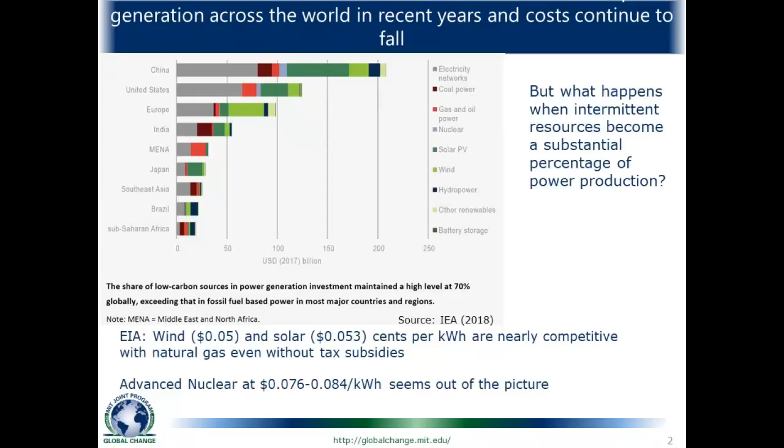Of course, you all are aware that the intermittency of renewables adds some additional costs that aren't captured in a levelized cost basis. So very quickly, there are a range of different electricity modeling levels, from capacity planning down to protection, stability of the system, load flow. The model we have doesn't get into stability and load flow. We're combining capacity planning down to economic dispatch.

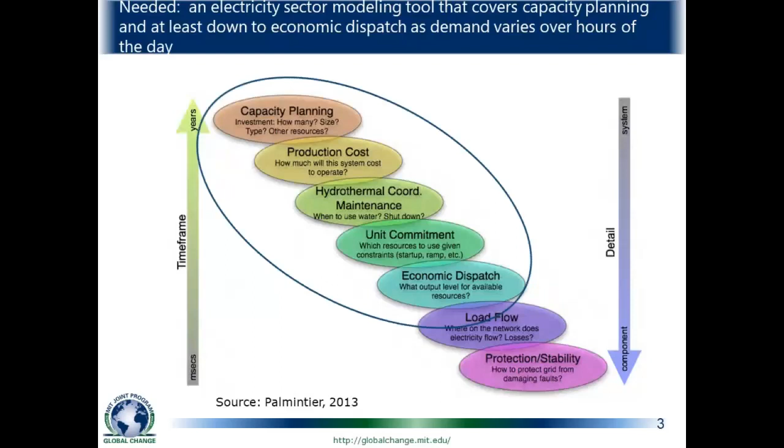So that's just a little thing about the model. There's another little slide on the model. It's deterministic. It's a cost minimization LP model that chooses the least cost options to build out as things retire and you need to build more. And then once the stuff is built, it dispatches the best.

There's various ramping limits on technologies. So one of the things, of course, is that nuclear is inflexible. So we have, in the base case, some limits on what you can do with that in terms of nuclear flexibility. So I'm not going to go into a whole bunch of the model. Hopefully, I had on the front page or somewhere a reference to the paper if you want to go look at it. If not, you can ask me. I'll send it to you later.

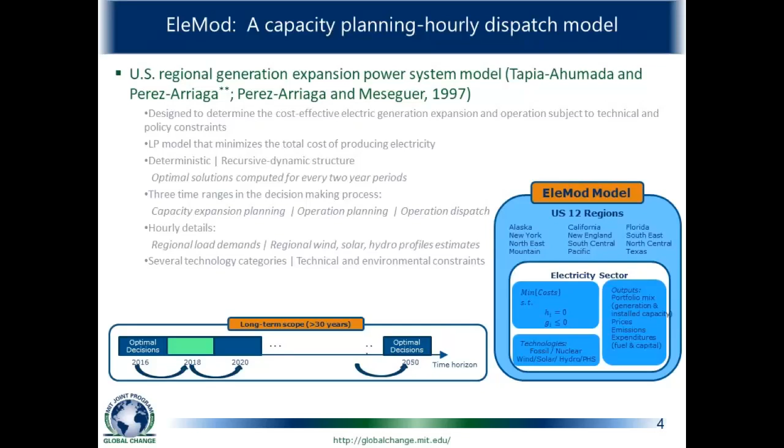So the scenarios we ran with this model was a reference with technology costs starting at, we used mostly EIA costs, but wind and solar, we wanted to make sure they were declining, that we're not disfavoring them. And of course, their advance has been fairly rapid. So we have them declining in cost at 3% per year, reaching a little at $30 to $50 a megawatt hour, where nuclear is at $94 per megawatt hour, the EIA current cost.

We do a cap. The rest of the scenarios all have a carbon cap, reducing CO2 emissions in the electricity sector by 90% from 2005, with the base technology assumptions there. Or then we have a low nuclear cost case where we drop it to 55 to 60 dollars per megawatt hour. Again, still considerably more expensive than the renewables, at least on a levelized cost basis.

And then we remove the limits on nuclear ramping up and allow it to ramp up and shut down easily. So a flexible nuclear case to test whether with greater flexibility, you could get more renewables and nuclear could play the flex role. We also have some pumped hydro storage ability that can work during the day, but we limit it to being charged or discharged in one day. You can also spill the renewables, so you can just build more renewables in different places and spill them. We've used a base NREL map of what renewable variability is for different regions of the country.

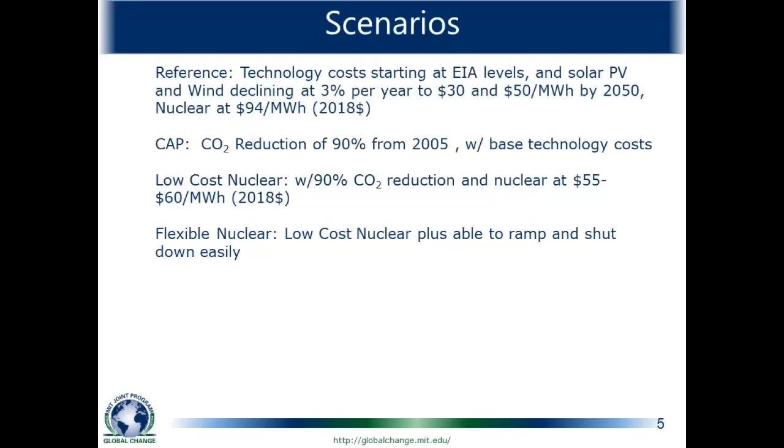So to get to the scenarios, this is, I think, the key scenario here. And so if you start on the very left, you see that is the generation from different sources in the reference case. And you see in the reference case, the green and blue on top are wind and solar. And you see that they continue to expand through that period, even without any additional carbon cap, because they are at the cost assumptions gradually getting less expensive than any other option on a levelized cost basis.

And this is going from 2016 to 2050. The next group over, that's with the cap case. And there you see wind and solar expand even more. We're achieving the cap. You will see on the bottom, the bars pointing down below, that we are getting a fair amount of spillage of just wind and solar being produced when there's no demand for it.

The next one over, we lower the cost of nuclear to that $55 per megawatt hour. And now all of a sudden that changes the picture pretty dramatically. We have a big expansion of nuclear. We still have wind and solar reaching about the same level it reached in the reference case, and so it is contributing to decarbonization. But once you get into that higher level, about 40%, we don't see it expanding much after that.

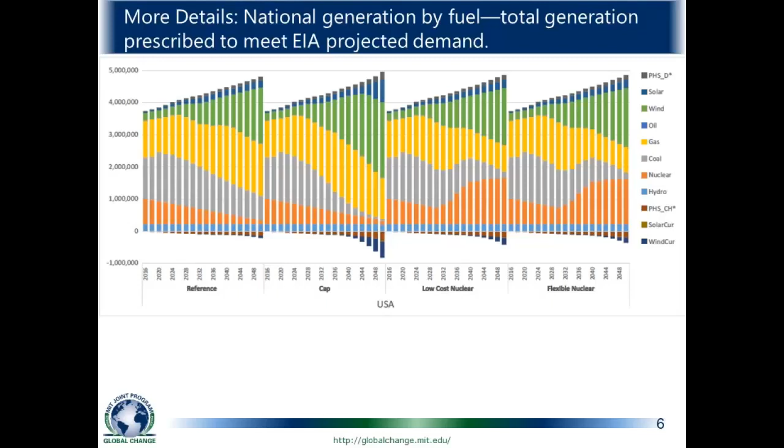And this is just showing the flexible nuclear. The low-cost nuclear is the same picture, essentially. But what you're seeing is that in that cap case, when we're relying more on wind and solar, we're building a lot more capacity. And that just reflects that a lot of it is being built and spilled. That's cheaper than a lot of pumped hydro storage or the expensive nuclear in that case. So that's kind of the trade-off there.

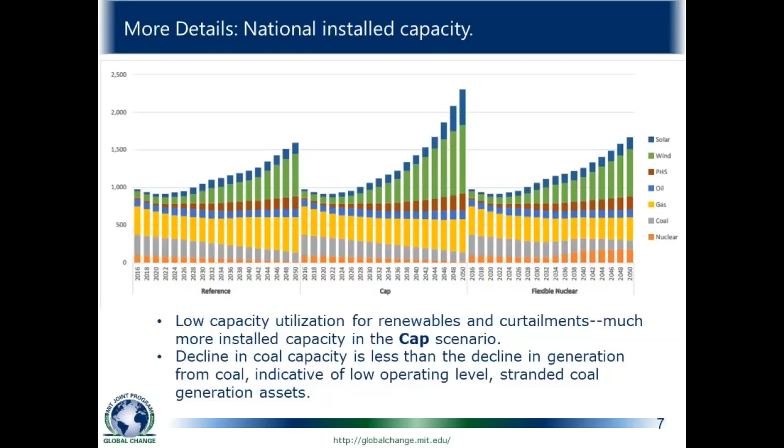What's the relative cost of nuclear and renewables? Nuclear doesn't have to be as cheap as renewables on a levelized cost basis, but it can't be as expensive as it is now. So what does that do? Well, this is a carbon cap, so we have carbon prices. You see the benefit of having that low-cost nuclear. Without that and just the renewables, you see the carbon cost rising up to almost $150 by 2050. So it just becomes ever more expensive to have enough power when you need it, when you don't have a dispatchable power source.

But if we add in the low-cost nuclear, then we get the carbon price dropping by 70%. And you see the flexible nuclear is a little bit cheaper than inflexible nuclear. So there's a little bit of an advantage to flexing it, but not much, at least going out to 90%. Now, if we wanted to go to 100, maybe then you would get something. But then you have to ask, could you get something like carbon-neutral biogas coming in? So that would be the other thing to look at.

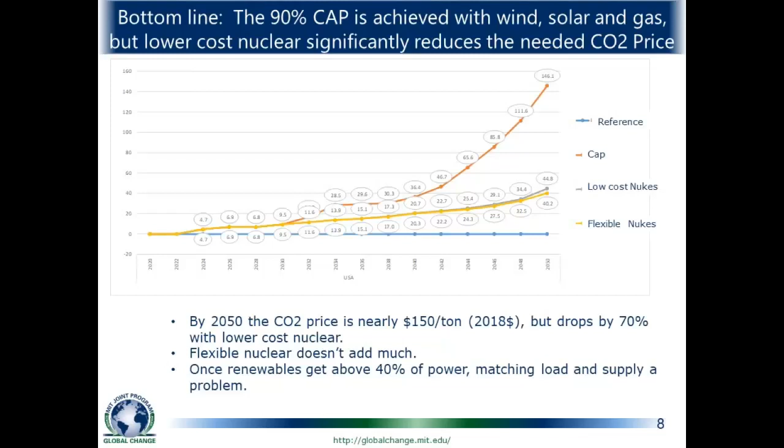So, variable renewables and nuclear, match made in heaven? Well, there is no match. I think they're mostly substitutes. The nuclear technical flexibility was largely irrelevant. We talk about economic flexibility, and you don't want to flex nuclear from an economic standpoint. So that seems to be more important than technical flexibility.

I think there are three basic possibilities here. Nuclear is too expensive and completely out of the picture. Nuclear is more expensive than renewables, but less costly than adding storage or spilling renewables, so that's when you get both. Or if it were really cheap and less expensive than the renewables, then why would you build any of them? Where the boundaries are between these three cases depends on the relative cost. We haven't pushed this near 100% carbon reduction, so that could change the picture a bit.

And this is an optimal planning model. There is always the result that the world never turns out as our optimal plan. Maybe under that situation, there would be some value to having technically flexible nuclear, because you might end up having to flex it in situations you didn't plan for.

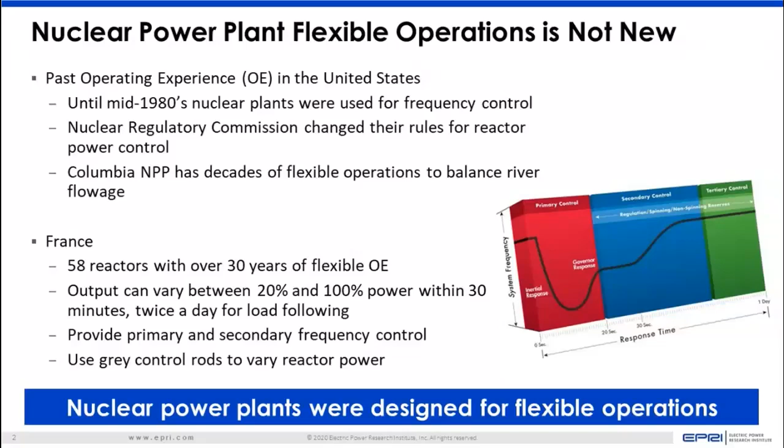So let's talk a little closer in the U.S. and some more recent experience. As renewables started coming on, a number of our EPRI members in the U.S. in particular, and also in other countries, started coming to us because what they were experiencing was these periods of negative prices. And so we started a research program. So since the mid-1980s, people haven't been operating flexibly in the U.S. and some of the other countries around the world, and they've kind of gotten used to being baseload plants. So we put together a research program. We wanted to assess the long-term impacts on the fuel and the plants and help develop some proactive strategies as we moved into flexible operations.

And we went at it with a phased approach. And this started in 2013. Since then, over 20% of the plants in the U.S. right now are operating flexibly in some range. And I've hit some of the highlights here. Xcel participates in a day-ahead market, and they're operating between 70 and 100% power. Exelon does what they call advanced nuclear dispatch, and they're in that same range. And you can see the ramp rates on theirs, and I can show you in the next slide some data that we have from Exelon.

The Columbia plant I talked about earlier, they do ramp between 70 and 100% power, and in the spring they also do periods of extended low power operation, particularly during the snow melts, to manage that. The Bruce plants just north of the border up in Canada, the CANDU reactors are designed so that they can bypass steam to the condensers, and they do quite a bit of maneuvering. As you recall, Canada has shut down their coal plants. So again, the base on the grid that is providing that flexibility is the CANDU nuclear reactors up there in Canada.

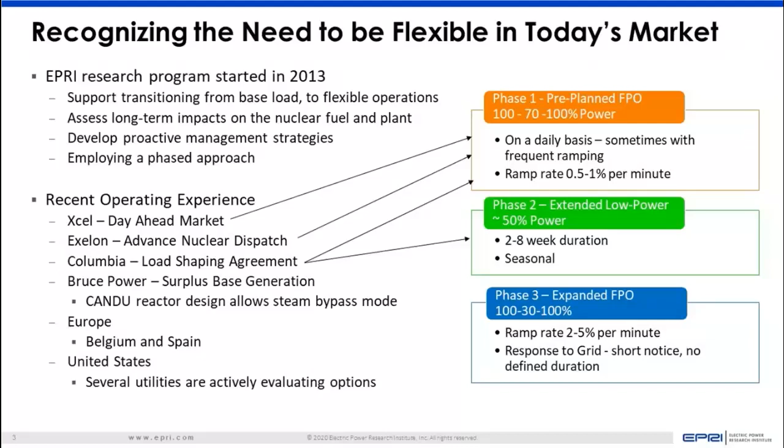So with that, we've been working, like I said, quite closely with our members, collecting the lessons learned as they've been operating flexibly since about 2013. The picture you see there, that is provided by Exelon for one of their PWRs. That's following economic dispatch over a 7-week period. That would be the spring, in response to the wind generation on the grid.

So what we found is it is very important, and this happens, that the plant operator does maintain the reactor in a safe operating window. The training for the plant staff, especially the operations crew, is critical. Chemistry of the plant does need to be monitored on a more frequent basis. For your pressurized water reactors, there is going to be some increase in water usage. So you have to look at your storage capacity on the plants and the amount of chemicals that you would use.

We've gone through and we've looked at, for some of the critical components, what the inspection frequencies and maintenance intervals would be. In some cases, those do need to be adjusted. When you look at the secondary side of the plant where you have the steam flow coming through, you do get some increased or some changes in the wear rates for the secondary piping based on the changes in the steam flows.

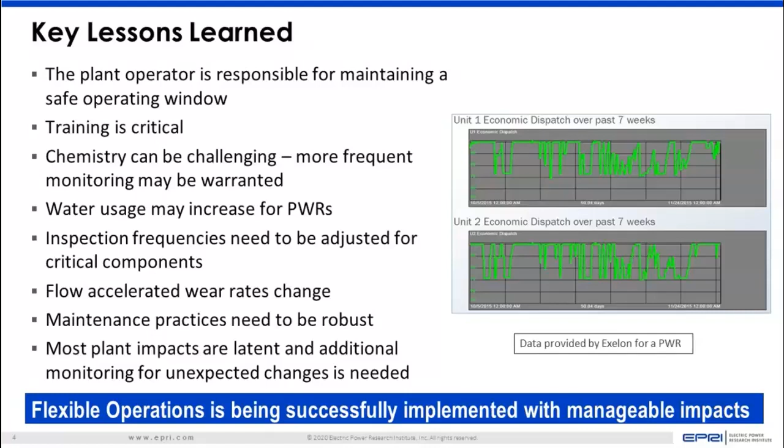The one thing that is important, when you're looking at this from a grid operations standpoint, is it's not like a coal plant. I'll say that right now. At least in the United States and several other countries, Spain in particular is one that we're working with, only a licensed reactor operator can change the power level. So what that means is that there needs to be a close coordination between the grid operator and the nuclear power plant control room.

And what we've found is that you want to have this well-defined up front so that there's a good understanding of the rate, the depth, the duration, and the frequency and the time in core life, which are all tied to the core physics, so that the grid operator knows when they can contact the control room, and the control room has a safe envelope in which they can maneuver the plant. This is all defined up front through these protocols.

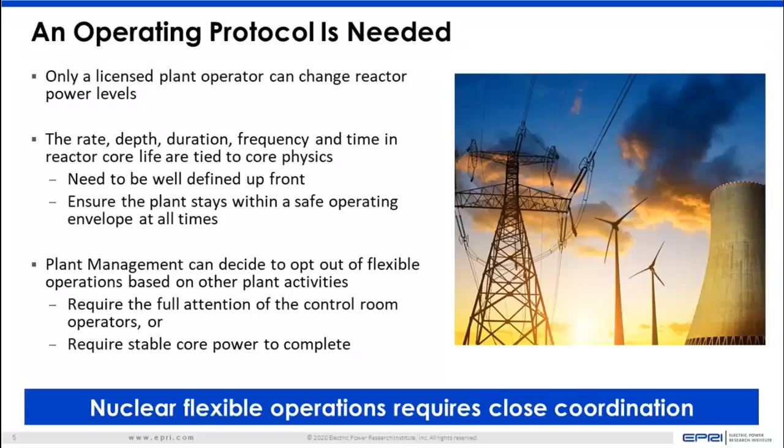And it also needs to be clear that any time the plant management can opt out of flexible operations. For example, if they do have other activities that are happening in the plant that do take their full attention, and there are certain tests that you need to do on a routine basis, like a core calorimetric, where you do need to have stable reactor power conditions in order to complete those tests. But other than that, with the protocols, things are working very well.

And we're looking towards the future with our research program on how we're going to optimize the flexible operations. We have some pilot studies going on right now on trying to quantify what the cost of the flexible operations is. We know the benefits and the value that it's giving. What we're trying to do now is quantify what is it costing the plant with regard to maybe some extra chemical usage or some extra maintenance frequencies.

We're also working on, for the plants that have been base load for a long time, how we can help them expand their range of flexibility. What plant modifications or changes would be needed to start approaching power levels as low as 30%, similar to what they do now in France.

We also have a study going on working with our power distribution group on grid services. Eric Ela, if he's on the phone, could do a lot better job explaining than I could some of the restrictions that FERC has right now on the primary frequency control from nuclear power plants. But we are working with him between our nuclear area and Eric's area on what is needed to look at primary frequency control from nuclear power plants as a grid service that could be offered.

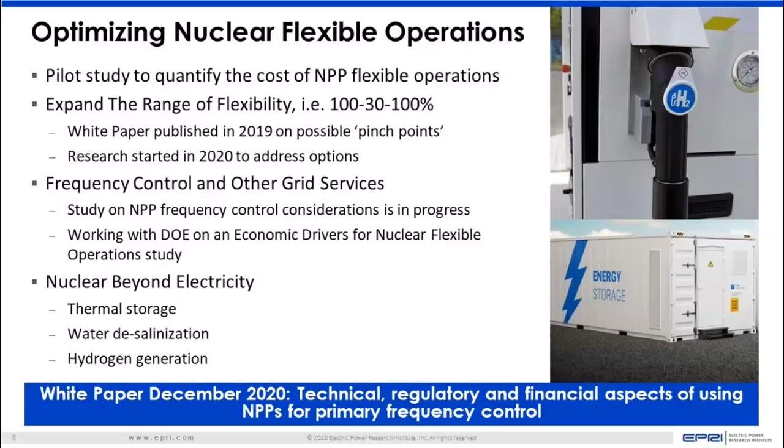And then we're also working on an area that Bethany is going to get into a little bit more after me, and that is what else can be done with the nuclear power plants. Instead of cycling the reactor up and down, can we look at using that energy for thermal storage, water desalination, or hydrogen generation?

This is an example. Again, Bethany's going to go into this a little bit more. I can look at it from the operational standpoint; she'll look at this from the economic standpoint. But if the plant's operating between 70 and 100% power, that's 30%, or 300 megawatts, if a typical nuclear power plant is 1,000 megawatts. Can you use that in a hydrogen electrolyzer to produce hydrogen?

The advantage is with the steam electrolysis, there's no carbon produced there, and you're using a no carbon emitting source from the nuclear power plant. So you're producing a low carbon energy carrier that has multiple uses. This is something we're very excited about, and the U.S. Department of Energy is funding some demonstration projects at some existing nuclear power plants to look at this.

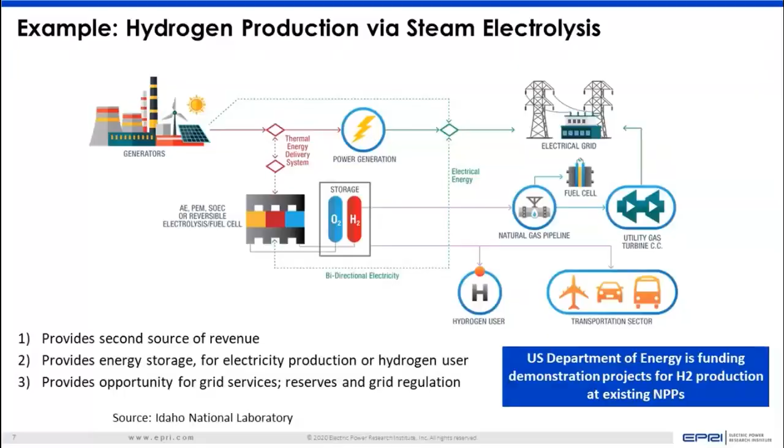And this was also touched on too, what does the future hold? Well, we're very excited, and I think our last presenter today is going to talk a lot more about the small modular reactors and some of the advanced reactors, and how by looking at it right from the start as you're designing the plant, there's the opportunity to be much more flexible. The other advantage that the small modular reactors and the more advanced reactors are providing is that they're going to have much higher steam output temperature.

To produce something like hydrogen today, we do need to boost those steam temperatures some more. It's still a good thing to do. The demonstration projects that are going on will be very useful to look at the economics and the logistics of producing hydrogen from the existing nuclear power plants.

But as you start talking about some of the advanced plants, the next generation, you can see that with the type of temperatures you get, you can directly convert using the steam with high temperature electrolysis, which is a lot more efficient, to produce hydrogen, ammonia, or other alternate types of materials. And the hydrogen can be used for direct energy usage, or it can be put into the pipeline to green up some of the natural gas. So these are just some of the options that we see.

So I talked a little bit about how, yes, nuclear power plants today are flexible, and looking to the future, we're looking at integrated energy systems with the plants today, and even further into the future at how advanced reactors can help with the flexibility, providing the electricity and some of these other forms of industrial processes that can be provided by the high temperature steam. So I go back and say that, yes, I think it's a match made in heaven. Thank you.

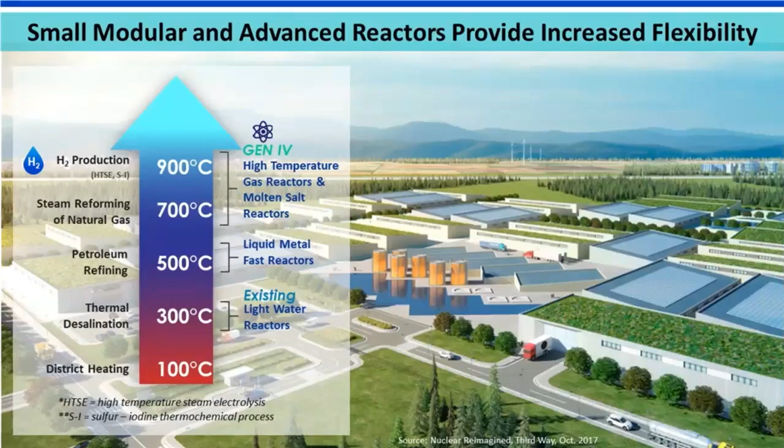Okay, thanks, Sherry. Our next speaker is Bethany Frew, who was a colleague of mine until a few days ago at NREL. Bethany is a senior engineer in the Strategic Energy Analysis Center at NREL. She's got a lot of experience with wholesale markets, power system operations and power system planning. She holds a PhD from Stanford University. Bethany, the floor is yours.

Great. Thanks, Mark. I'm really excited to be part of this panel and presenting on a different topic than I normally do. Those of you who know me from past ESIG events will recognize that I have a power systems analysis expertise. But this effort that I'll be presenting today, both from a conceptual framing standpoint and also some results from a publicly available analysis document, really reflects a much broader team effort that includes experts from the nuclear and the hydrogen perspective.

So I want to build upon some of the content that Sherry has presented, especially as part of this broader conversation about how nuclear power plants can remain economically viable in a low power price world. The work we've been focusing on at NREL, along with our project partners, has focused on two main approaches. The first is to operate the nuclear power plant less during times of low power prices, where you're trying to minimize your losses. So where you're being compensated at a lower price than the cost to operate, it makes sense to turn down.

The second option is to produce something of higher value during times when power prices are low. In the case of my presentation today, this something of higher value is hydrogen. So I'll be talking about how we can potentially hybridize nuclear power plants to produce hydrogen during certain hours of the year.

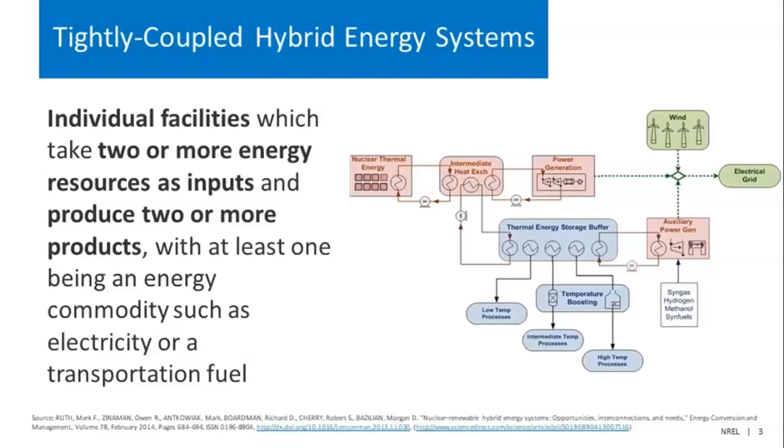In this case, we have a nuclear power plant and a wind generator as your two inputs, and your two outputs are electricity going to the grid, and then thermal output, which can be used for various industrial processes. So we're taking this traditional definition and applying it to a specific instance with a nuclear hydrogen hybrid system.

This is a very simple conceptual slide that shows what we mean when we say this nuclear hydrogen hybrid system. So in this case, we have a nuclear power plant that can send electricity as one product to the grid, or it can divert some of its heat and electricity, or just electricity, depending on the electrolysis process, to an electrolyzer to then produce hydrogen that goes to some sort of end use. Sherry highlighted a few of those end uses, and I'll mention a little bit more about that in a couple of slides as well.

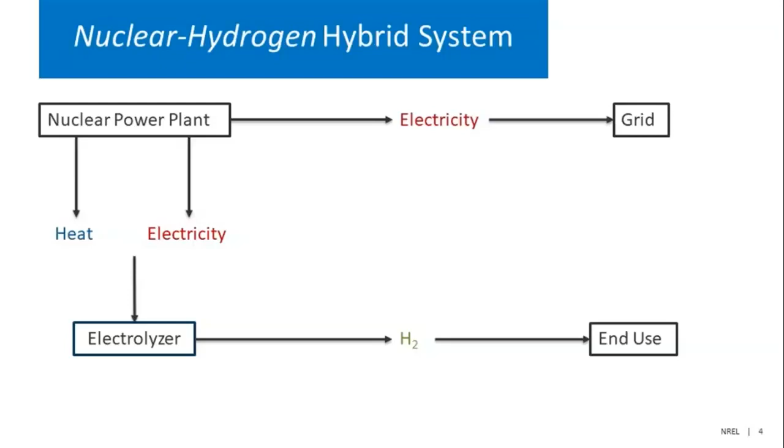And so in this case, again, electricity and hydrogen are our two products, but why do we care about hydrogen? Why is this something that we want to focus our efforts on? And it turns out that a non-trivial amount of primary energy use in the United States goes to producing hydrogen, about 2%. And if you look in this Sankey diagram here, you'll notice that the energy that is used to produce hydrogen is coming from natural gas.

This was mentioned a little bit in the presentations before me, but steam methane reforming is the traditional process that is used to produce hydrogen. And natural gas is the main ingredient for that. So when we're talking about hydrogen, the price for hydrogen is strongly correlated to the price for natural gas. And therefore, when we talk about carbon, it's driven by the natural gas input as well.

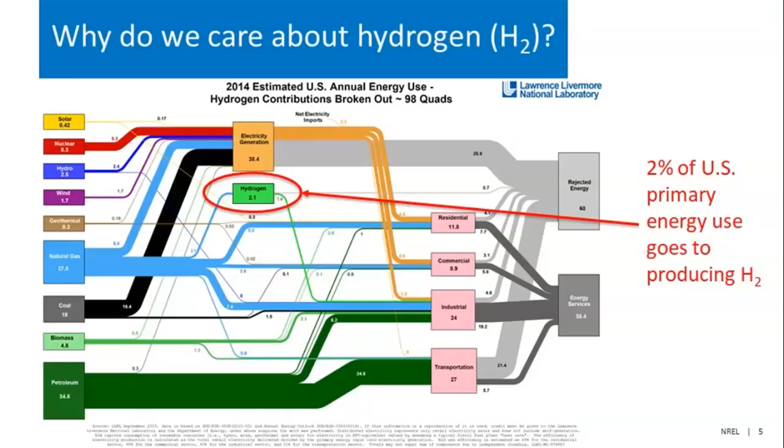There's also a lot of growth for hydrogen, and this is really the key part here, that we're able to think about these hybrid systems being able to contribute hydrogen to a growing demand for that product. Some preliminary results shown on this slide indicate that the hydrogen market by 2050 can increase by a factor of over 9. And this is, again, driven by applications from some of the traditional areas, including refining, also ammonia production, that's a big one, but also some newer applications.

Again, Sherry mentioned some of this previously, but being able to produce steel, being able to refine biofuels, and also contributing to a broader transportation fuel cell application. And also, Sherry mentioned this too, being able to inject some of the hydrogen into existing natural gas pipelines so that it can contribute to greening up that fuel source.

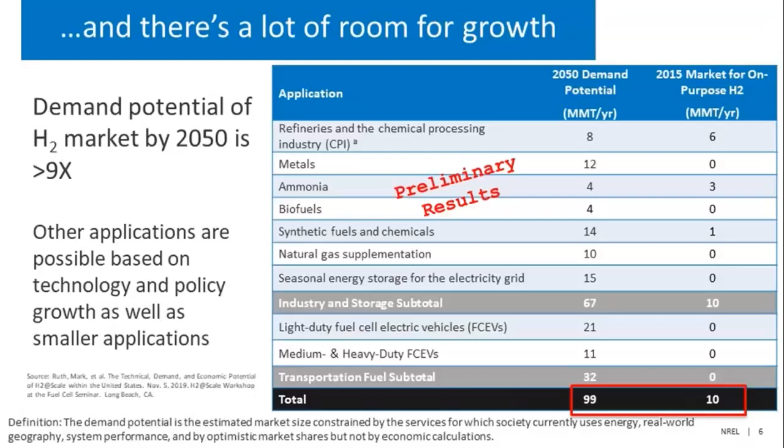So when we talk about hydrogen production, there are two main processes or options. There's low temperature electrolysis and high temperature electrolysis. Low temperature electrolysis, which is shown on the left, only requires electricity. So you'll see on the bottom left figure that the gray arrow going into the low temperature electrolyzer is just electricity. Conversely, high temperature electrolysis on the right side requires both electricity and thermal inputs. And so you'll notice in that figure on the bottom right that there's a gray arrow from electricity and a red arrow from the thermal component.

So because low temperature electrolysis is lower temperature, it's lower efficiency, but it also has lower costs and it's more nimble and simpler to integrate. High temperature electrolysis, because it's a higher temperature, is higher efficiency. Currently, it's higher cost, but there's a lot of work being done to try to drive down some of the material costs that go into that process. It's also less nimble.

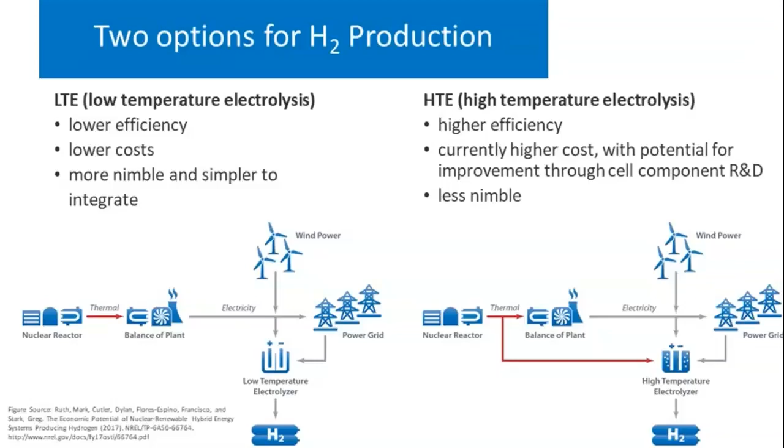So potential benefits of hybridization, and this is really the crux of why we're doing the work we're doing, is that you can imagine with such a hybrid system you can dynamically adjust the overall output of your, in this case, two products, electricity and hydrogen, to be able to maximize the revenues for the overall system. So when electricity prices are high, you maximize your electricity production. When electricity prices are low, you maximize your hydrogen production.

And so you can imagine a future where we have a lot of renewables, and this gets back to the focus of this entire session. You have a very high penetration of zero marginal cost resources, and so many hours of the year are low or zero LMPs for your energy prices. And so in that case, you might have this hybrid system that is producing hydrogen for most of those hours that are low prices, and then only a relatively small number of hours it's producing electricity and effectively operating more like a peaking plant.

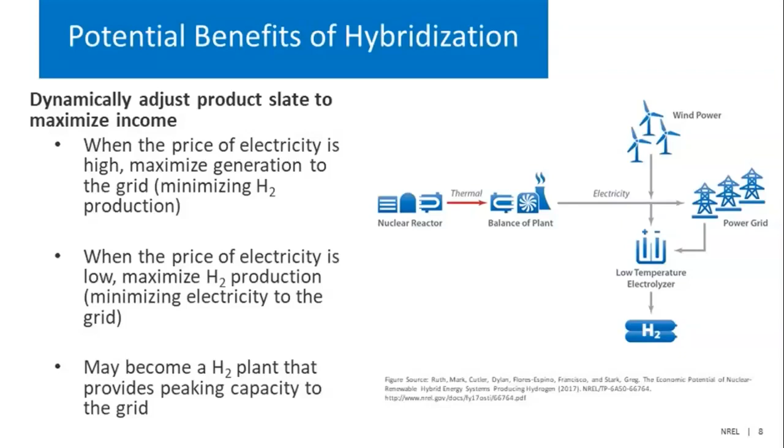And so this sort of conceptual framing and justification is what led us to the work we're doing now, and we were charged with maximizing the profitability of such a setup for a specific nuclear power plant that could be converted to this hybrid system. And so with the remaining couple of minutes, I'm just going to talk through an analysis that we, along with the project partners that I mentioned earlier, have conducted, and this is just one example.

The second main component is electricity price estimation, which is what we did at NREL. This involved capacity expansion modeling to project what the build out for future years at this specific location of this nuclear power plant would be, and then taking those build outs and putting them through a production cost model to estimate the hourly LMPs. And so the combination of these electricity prices and the hydrogen market estimation were fed into a techno-economic analysis led by Idaho National Laboratory that determined the NPV profitability.

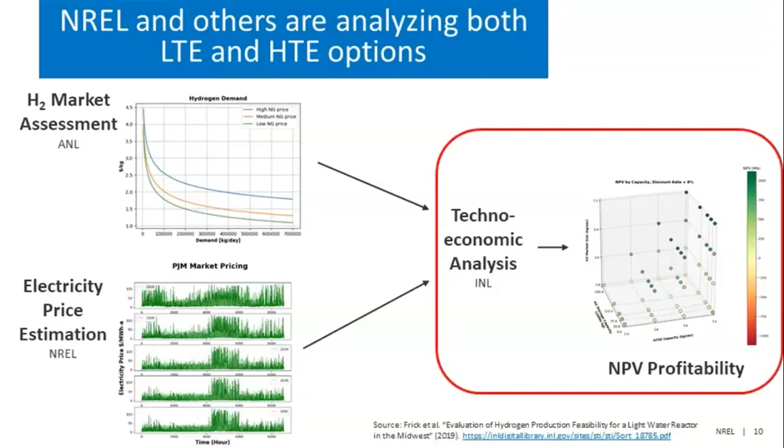And so I just want to take a couple of seconds to talk about this piece that sort of pulled all of this together. Again, this was looking to maximize the net present value. And there are three main dimensions of this analysis, again, looking at all hours of the year, and that's shown in the figure on the right. Those dimensions are the hydrogen market size, which is the vertical axis, the hydrogen storage capacity, which is the axis that's going in and out of the screen, and then the electrolyzer size, which in this case was a high temperature steam electrolyzer, which is on the horizontal axis.

And so the profitability really depends on a lot of factors. There's a lot of interdependencies that happen here. It's very location specific. And so some of the key levers that we found in this work is that profitability depends on the relationship between hydrogen and electricity market prices. So if electricity market prices are really low, then it makes a lot of sense to produce hydrogen. If prices are very high, then it might not make sense at all, and you're better off maximizing your output in the electricity market.

It also depends on the size of the electrolyzer versus the hydrogen demand, and also the size of the hydrogen storage. The electrolyzer and storage are capital intensive items, and so if you oversize those and you aren't able to have sufficient utilization, you're basically wasting capital.

So the key finding, and this is what I want to leave you all with, is that nuclear power plants with regional demands for hydrogen, so in other words, again, it depends on the location, have the potential to increase their profit margins by hybridization with hydrogen production. Again, a lot of details are involved with this, but there is the potential.

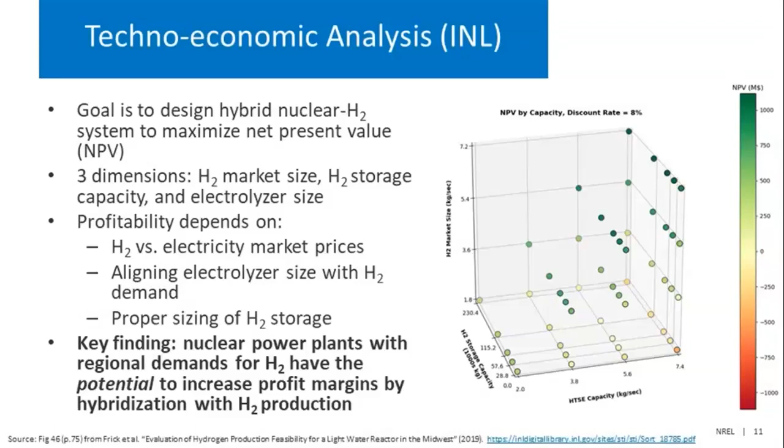There's been several comments made about the fact that electrolysis needs to be run 24/7 to make it economic, and the same is actually true for nuclear power plants. So is what you're proposing playing to that? Does the electrolysis run 24/7? Maybe not by nuclear, but by other means. Is that correct?

At least in the configuration that we've been evaluating, the nuclear power plant is running 24/7, so it's running at full speed. In layman's terms, you're effectively throttling between electricity maximization or hydrogen maximization. So you still have the same amount of steam and electricity. It's just whether, assuming you have a high temperature electrolyzer, you divert some of that to the electrolyzer or send it all through to the grid.

But I can't speak to that. At least in the work we've done, we haven't been assuming that the electrolyzer is running 24/7. I think there's a lot of options, and this is where Idaho has taken the lead in optimizing the electrolyzer size and operation. So I might let others who are more knowledgeable speak to that point. Maybe the electrolyzer may be uneconomic in that case, but we'll see.

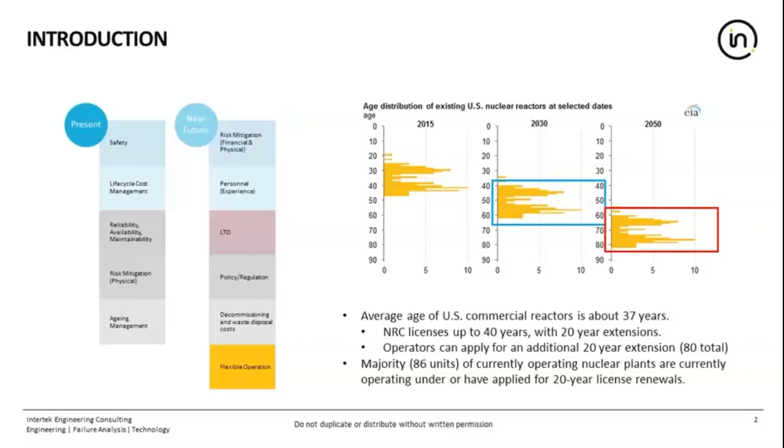Of operation, and some have applied for an 80-year extension. So long-term operation certainly is part of the equation. And then I think flexible generation will become part of the equation for these operators. So we are obviously looking for grid flexibility and increased renewables, but I think part of the discussion is having to operate these nuclear units safely.

If you go to a nuclear site, I think the number one motto there is safety. Reliability, obviously, but then to some extent cost recovery, because if in the French case you increase the cost of generation by 2%, if you look at the paper, then already nuclear is not all that cheap to operate, and I'll show you that, especially if you don't operate it baseloaded.

So similar to what Sherry said, most existing plants actually are already designed to respond to some amount of load change, and you can do that without tripping the reactor. And the other case, and this is not common, you need to get regulatory requirements met, safety requirements met. But you can actually reduce the thermal efficiency of a nuclear unit by dumping that steam into the condenser. So there are certain mechanisms available to units today without a lot of operational changes or extra O&M or retrofits to make them flexible.

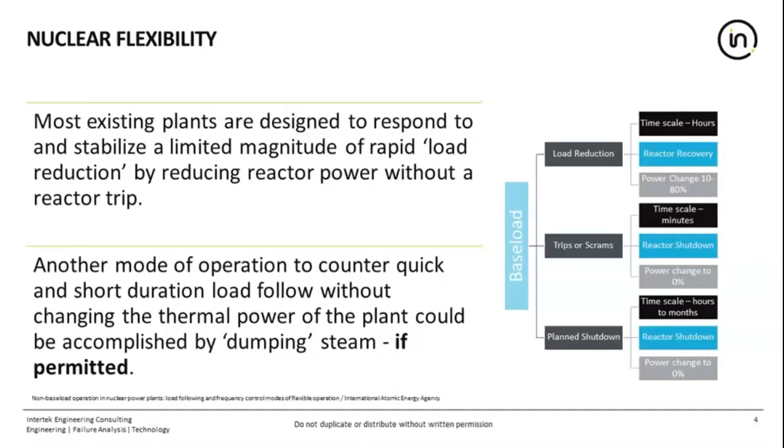So I won't talk so much about baseload operation or frequency control. Let's talk a little deeper about load following, because with flexible nuclear generation, maybe the SMR designs, newer designs, will be able to do more than load following. But in today's scenario, let's just focus on load following. So what we're talking about is megawatt changes up and down, not turning off the entire unit. There are certain ramping constraints and some minimum load requirements here.

So even with the French units, not all units go down to 10% or 15% low load. There are certain limitations to minimum load. There is some equipment damage. There are also fuel cycle limitations. I think Sherry mentioned the PWR units. As you get into the latter part of the fuel cycle, even the French operators minimize the flexible operation on those units depending on the health of the system, economics and obviously cost. So that's really what I'll focus on.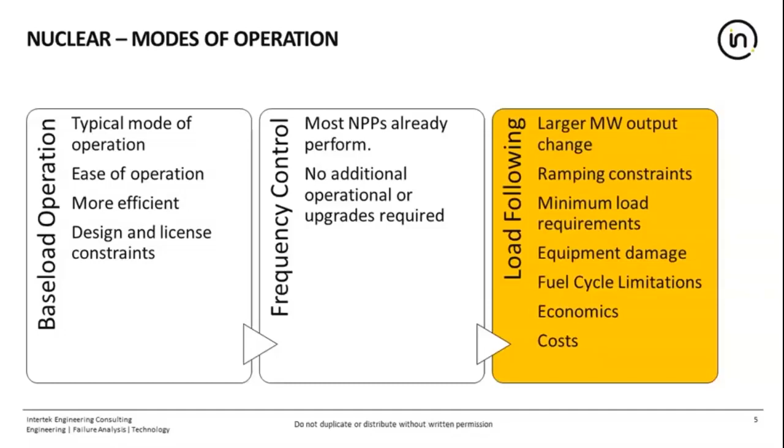And here's the German case. It says grid requirements in the 1990s, 1992. The blue lines show what the grid requirements were back in the 90s, and they were considered in the safety analysis and establishing the design limits, which are in the red. And they actually included flexible operation back then in the 90s. They've been expanding some of these limits even today, for however many more years they operate. But this was part of the design mechanism for the German PWRs.

In the US, we haven't quite done that. The French obviously do that. But if you look at that table when you get the slides, you can see in more detail that there were quite a lot of cycles allowed within the design framework of these units to operate safely. So that's just one example.

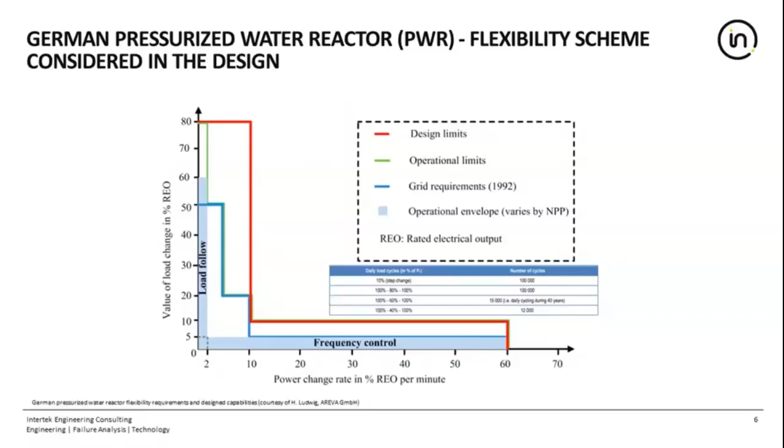And then this is the Bruce Power operation, which is in blue. This is a little bit old. I was trying to look at more recent operation with flexible generation, and it's actually minimized a little bit, possibly for some other reasons I'm not entirely sure of. But a couple of years ago, we could clearly see a lot more movement for Bruce Power over the day and over the week as it operated flexibly. So units are, as Sherry said, operating in some amount of flexible generation already.

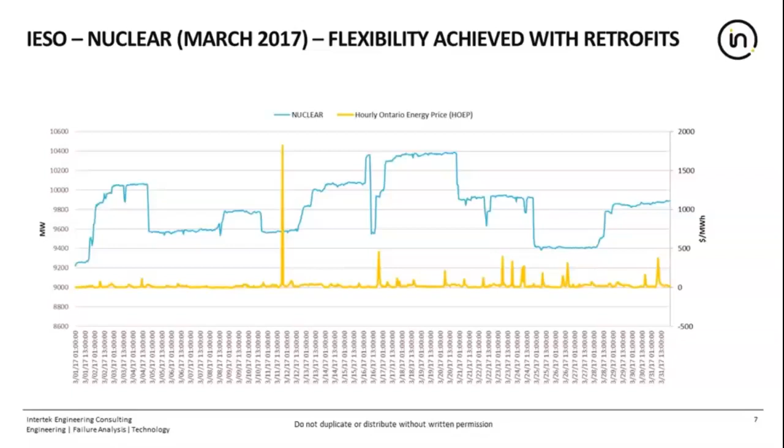And before we get to the economics or cost recovery of flexible generation, let's see what's happening already in the US. The market is actually the big driver for a lot of closures. So 11 gigawatts of nuclear capacity is about to retire by 2025.

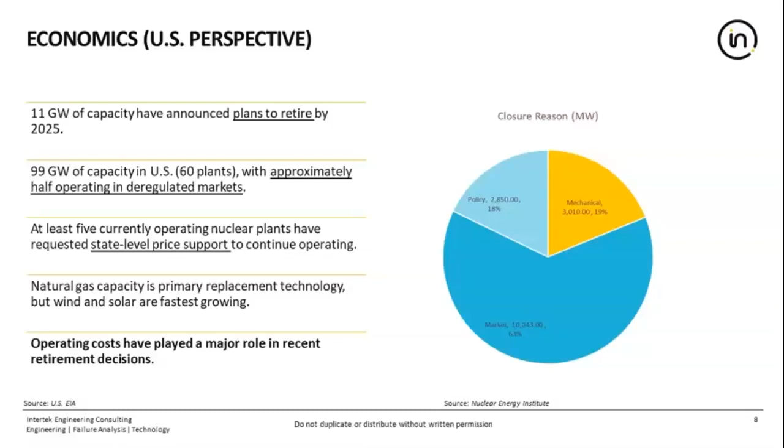Half of the units operate in deregulated markets. So there is a lot of pressure from the market. But the big problem here in my world is that the operating costs are the major drivers of why they're not in the market when they're operating. And when you look at it from an O&M standpoint, the nuclear units, both from an operations standpoint as well as maintenance standpoint, are far more expensive than the conventional fossil fleets.

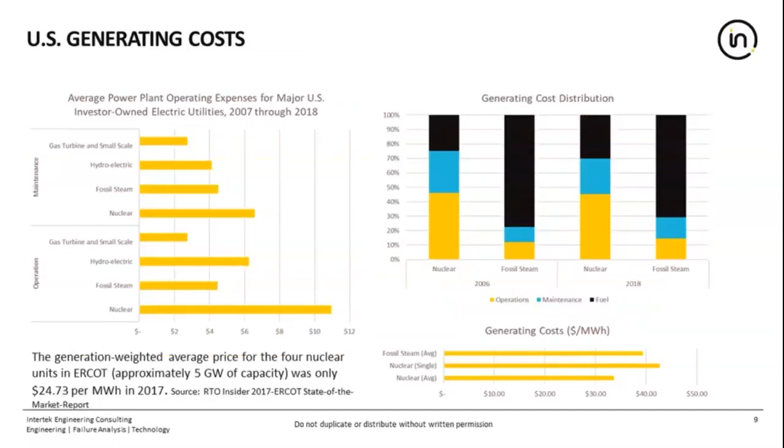And so we have been making efforts to reduce that over time. So when you look at this chart, you could see that in the past, from 2002 till about 2012, we saw a steady increase in cost for nuclear units. And this was a lot to do with relicensing and uprates and all of that. But there has been a lot of effort on the part of nuclear units to reduce that cost. So we're seeing an encouraging trend of reduced O&M, which hopefully into the future will help make operating in deregulated markets a little bit more profitable.

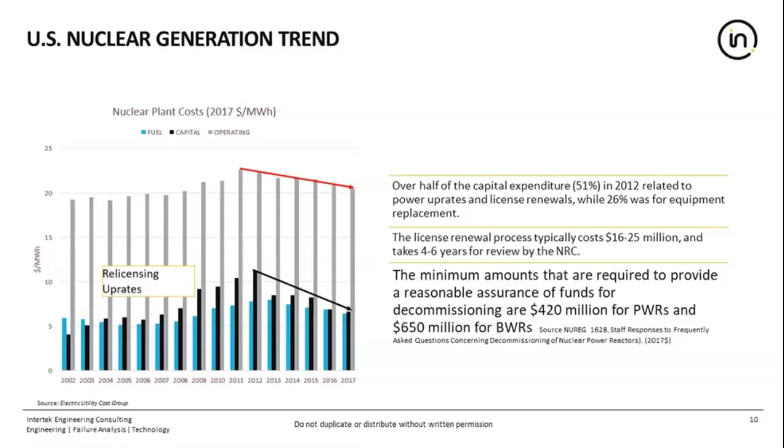So when we look at nuclear flexibility, we need to take into account the range of operation, the duration of low load operation, and the ramp rates. I'll talk a little bit about ramp rates in the coming slides, but there are a number of things that we need to take into account as we operate these units flexibly. So I'll leave it at that and keep going.

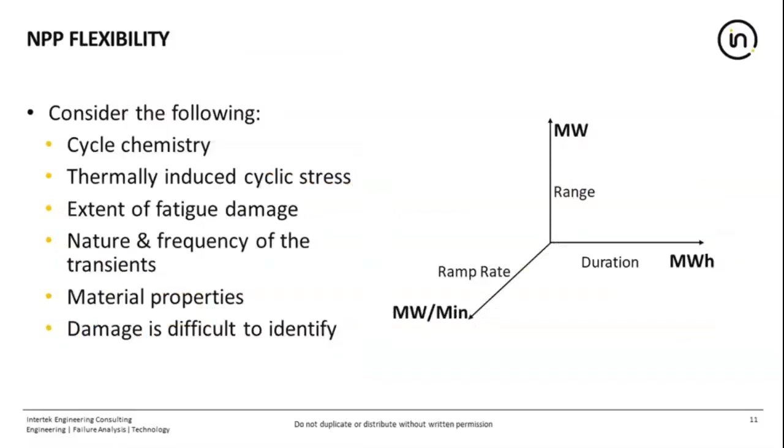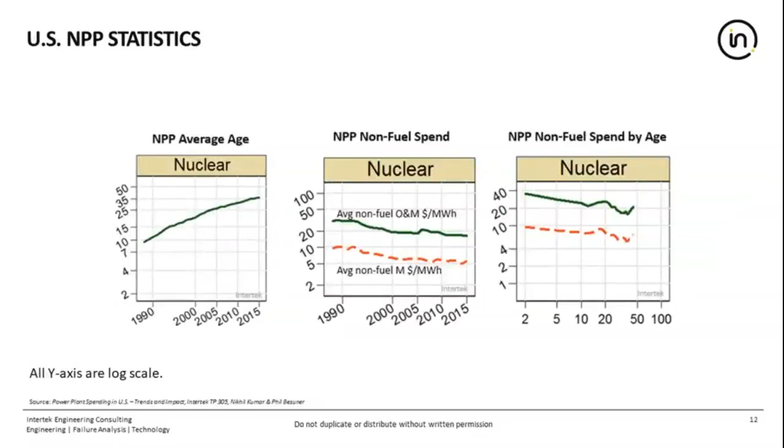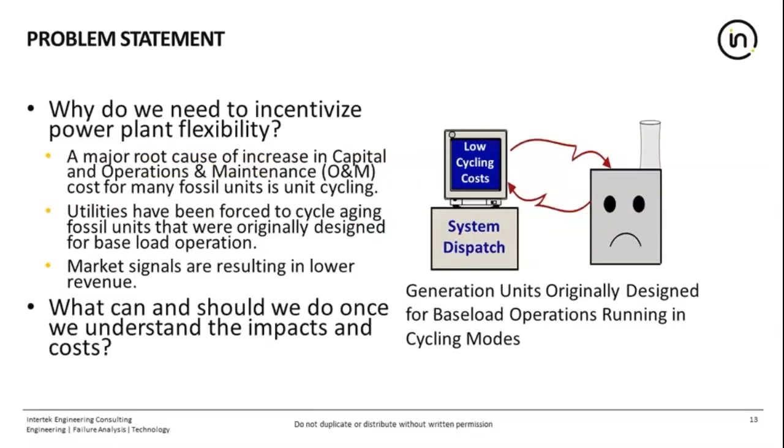Now, we show this slide in a number of our works for a conventional fleet, and I want to remind you why that power plant is upset there. It's upset not because you're operating it in a flexible mode. It's upset because it doesn't get cost recovery for the increased damage that it incurs from flexible generation.

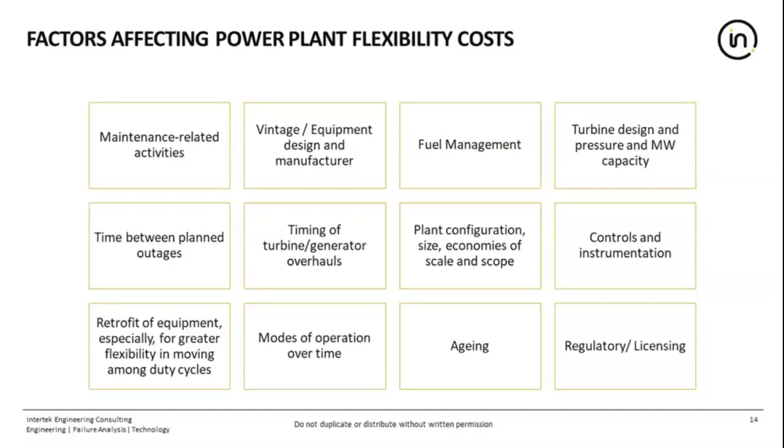I think there are a lot of experts on this panel that can talk individually about each of these blocks. But fuel management, vintage, aging mechanisms, mode of operation, fuel cycles, time between outages: there's a lot of variables that come into play when we talk about flexible generation costs. And what you have to do is really come down to the individual unit. If you want to see a safety case for a nuclear unit, it can run into hundreds and thousands of pages looking at every single component, looking at their fatigue life consumption. So there's a lot of work that needs to be done.

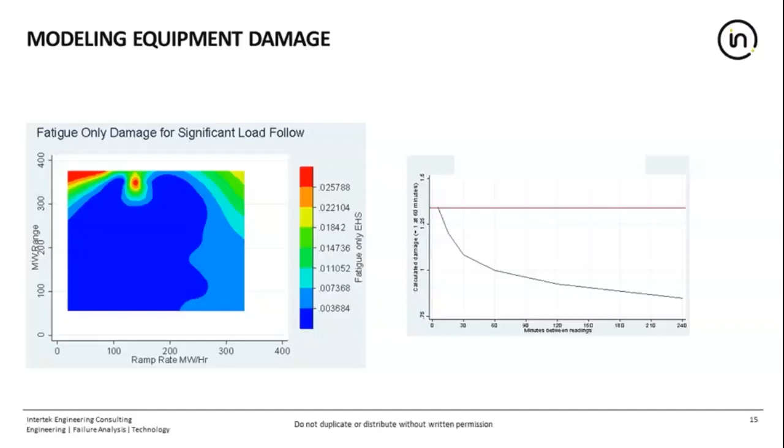I know EPRI is doing a lot of it. Individual units are doing it. EDF has published some really good papers on this. But there's a lot of work that still needs to be done to quantify how much of this fatigue life consumption occurs as you operate these units in cycling mode. And it's not just happening on the nuclear side. The excess damage on these units, the electrical controls, the generators, the conventional part of the nuclear unit, the steam turbine, all of them get impacted as you operate these units in flexible mode.

So the 2% increase in O&M isn't out of the realm of what is possible. In some cases, when we've studied these accounts for US units, they're not even as high as 2%, in some cases less than 2%, but we have seen some units where the O&M expense may go over that 2% level. So 2% is probably a good approximation to start with.

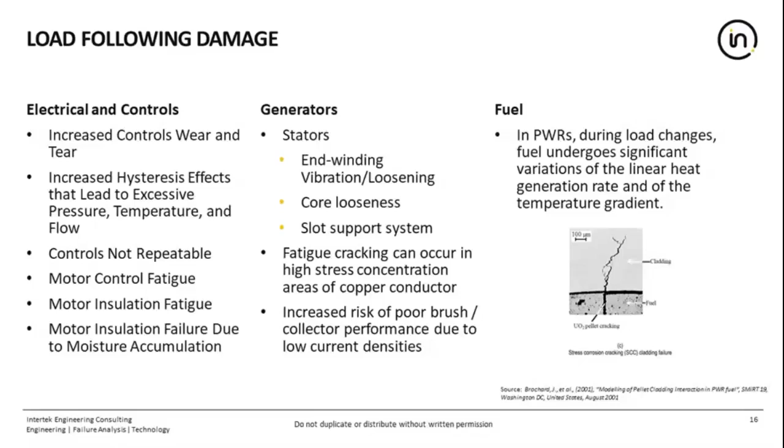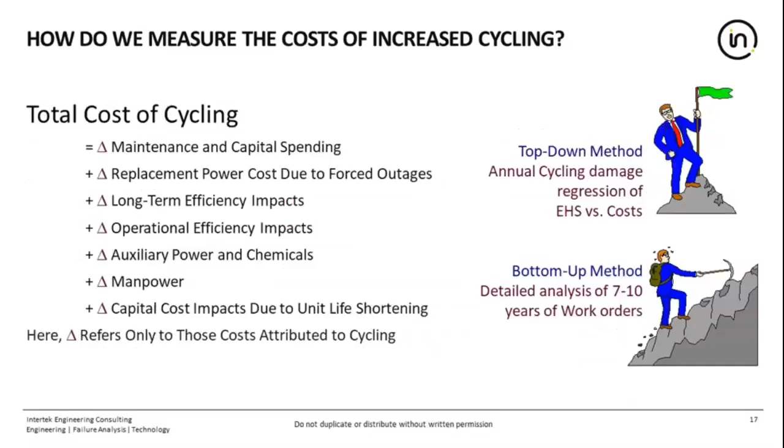So we have been developing a number of methods to actually quantify what this excess cost will be as you operate these units in flexible mode. The auxiliary power costs do go up if you operate these units in flexible operation. This is particularly the case for nuclear units. And the fuel is another big area for us to consider.

So when we study, for example, a BWR unit, when you look at the total system, you're trying to look for candidate costs. What are some of the costs that can or will get impacted by flexible generation? So this is just a snapshot of what is possible. And like I said, fuel is a big part of it. The condensate system is next. But this is just an illustration for you all to see where these costs can come from.

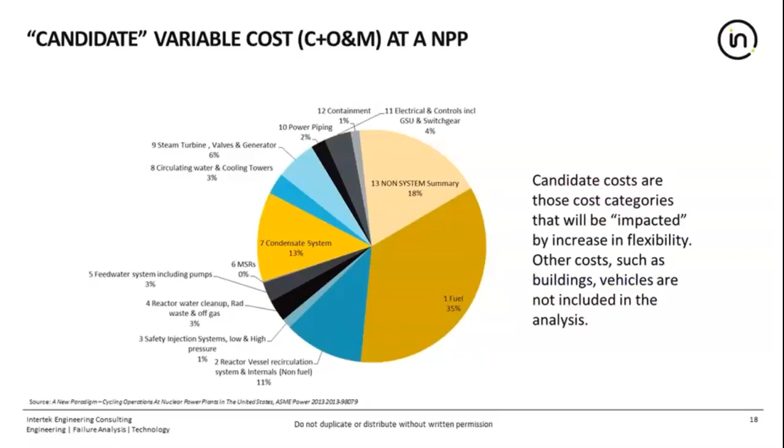Each cycle has its own damage mechanism. Your pumps, your feed water heaters will behave differently versus your steam turbine or the primary circuit. So there are certain constraints, certain limitations to this analysis, but we just wanted to give you sort of a range of what this cost looks like from a load following standpoint.

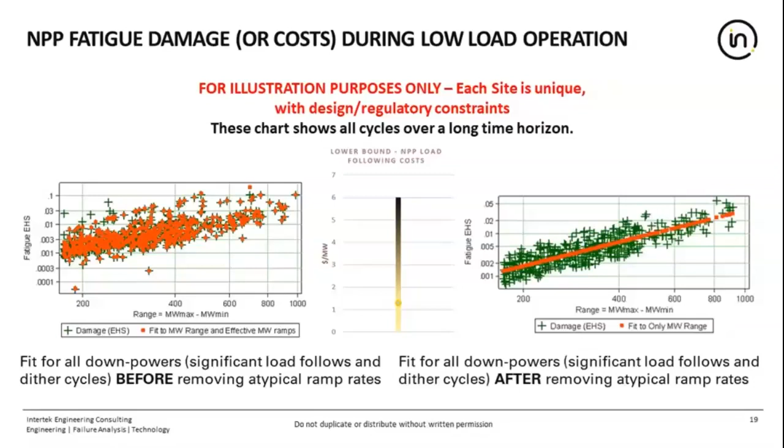And I'll finally give a shout out to a report that the IAEA published, and Dr. Kilich was one of the lead authors on that. But if you want, you can click on this link, and there's a lot of good discussion on some of the constraints of this flexible operation. So I'll end my talk here.

Hello, Mark. Are you on mute? Yes, I'm on mute. Oh. Sorry. Okay, we lost. So I was speaking to myself there.

Okay, thanks, Nikhil. So a couple of questions for you. So going forward, are these costly engineering issues that need to be addressed to provide flexibility in new plants? So, talk about new plants, Nikhil. If we were to build new ones, you're looking at existing plants, I assume. What about new plants? Right. I think the next presenter can talk far more in detail on newer plants.

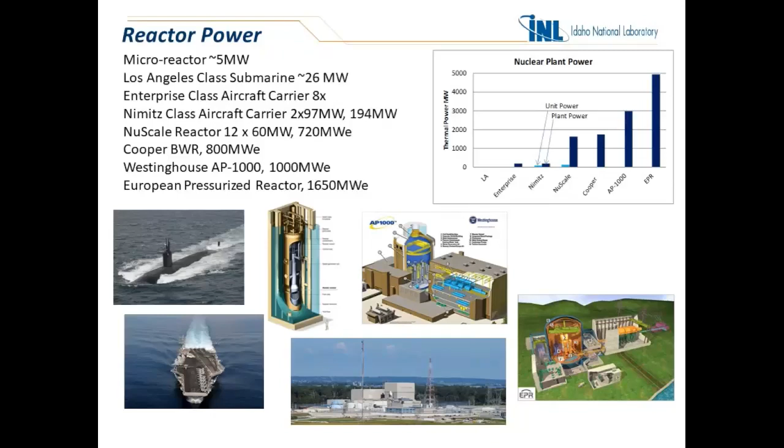What makes an SMR unique, particularly the NuScale design and some of the other forward-thinking ones, is that they're integrated. This is the NuScale module to the left there in gray. The little tiny block is the core. It's about 6 feet high and about 6 feet in diameter, and sits at the bottom of essentially a giant thermos. And the upper portion of that is what was shown on the graphic on the front page, the top part of that thermos. And what's really interesting is they have managed to take all the components of a conventional PWR and squeeze them inside that vessel.

The upper right picture there is a conventional look at a Westinghouse style PWR. You've got steam generators, external pumps, pressurizers, all of those components, their piping, their valves, the instrumentation, all of that has been squeezed down and simplified to go inside of one of these modern reactors.

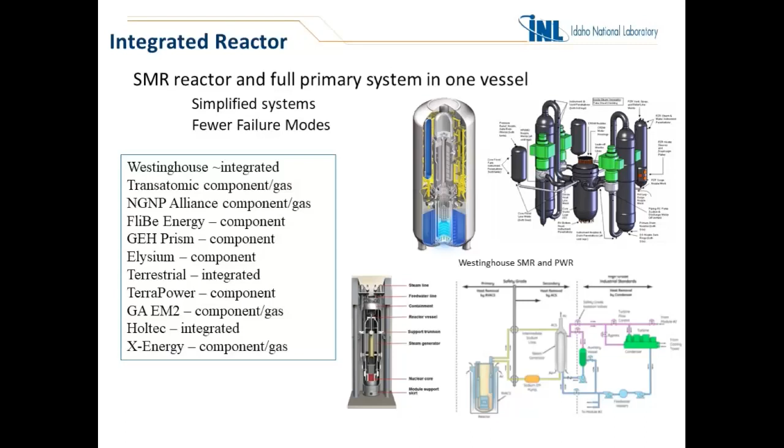And so the NuScale reactor in particular was designed to address a lot of the issues you guys have been talking about. What's the maintenance look like? Well, an easy way to get rid of maintenance is to get rid of parts. One way to get rid of engineering is to get rid of complexity. So these reactors have been very much designed to address the grid that was pictured. And the design process for this was almost 20 years ago, but the reactor design itself seems to be well suited to the sort of problems that we've been discussing. So an interesting benefit there.

So for a single unit, that big thermos on the truck, this would be one of them, 60 megawatts electric. It's a conventional PWR, so 28 to 33% efficiency. They give up some of the efficiency on that, the high temperatures, to be conventional, to not take technical risks, to make the NRC licensing easier. There are a number of advanced designs that are much higher temperature. They engage with technical risk and NRC questions and difficulties with licensing as first of a kind. So these reactors are designed to go through the licensing process as well.

You can see they're about 3 meters in diameter, 20 meters high. And the staff at one of these plants is going to be about 365 as compared to about 800 at a standard single unit plant in the US. And the picture shows the very large container of water, the pool that each of these reactors will go in. And the standard design right now is to put 12 reactors in their bays on the left side there. The right side is used for incoming units, for maintenance, for refueling. And the left side is the 12 units to produce power.

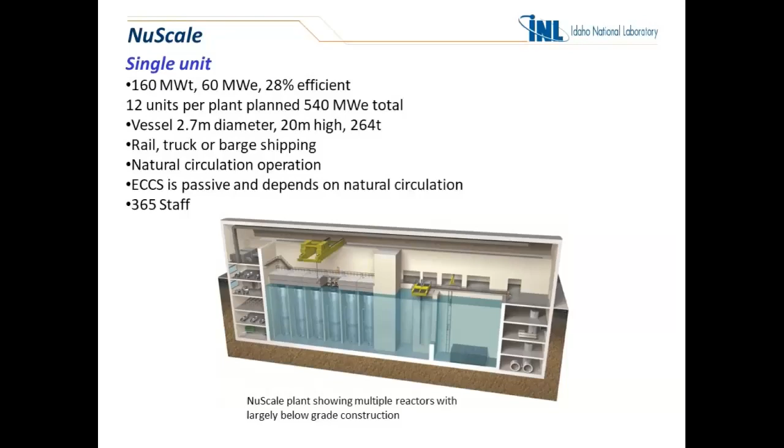In this design, each unit gets its own turbine and condenser and power generation system. So as we'll get into it, that shows some flexibility that's inherent there that you don't get from a single shaft on a gigawatt machine. And as part of the systems work that we have at INL that's shared with NREL and others, we've been building a model of this particular type of reactor. So that's the graphic on the left, built in Modelica, the core at the very bottom again, and all the steam generation equipment up above that in the reactor.

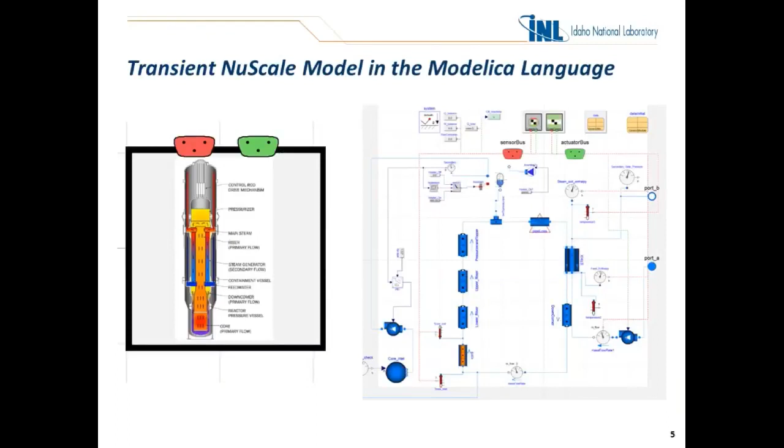And so by building component models, these can be hooked together, putting the right attributes on the way they're connected, the way they interact. You build an accurate model of the reactor system. And here it's blown up a little bit. You get steam manifolds there as a component, so you know how the steam travels out to the turbine and back, a turbine model in and of itself, a line break, and then in this case an infinite grid, so someplace to take the power off of. A large amount of detail can be and is being built into these systems.

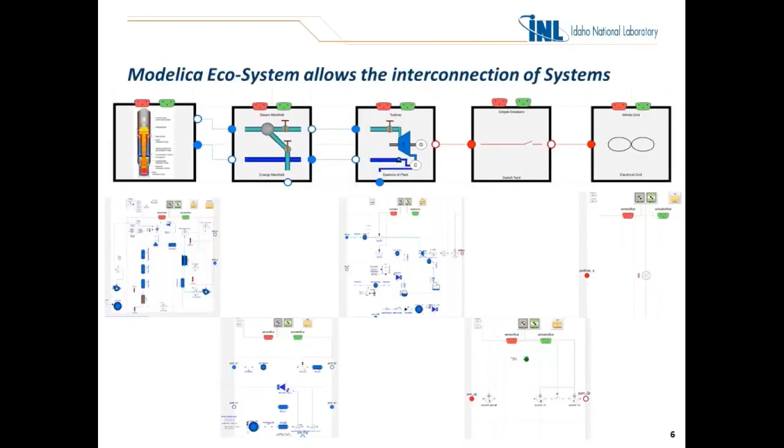All the way down to, we're talking about, what are your licensing restrictions? What are your performance restrictions? We have the model built so that it can actually keep track of thermal limits. You can't operate your reactor so it's too hot or in a condition where it might be dangerous. And that's all managed through the license and the NRC application process. So this model actually gets down to those level of details, things that are interesting from this engineering standpoint, like fuel center lines, bulk fluid temperatures, things that you need to monitor in a real plant, makes this more realistic.

So we're trying to address some of the questions that have popped up here. Details on the pressurizer and how you heat and cool that to maintain reactor control, and the details in our particular model on how do you change power? Do you move the control rods? Is it flow related? Other sorts of issues are all modeled in detail.

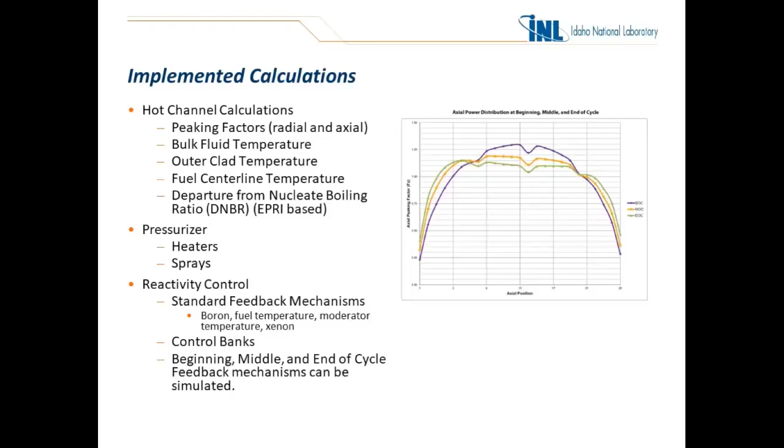And so we started out to build a replica of the NuScale unit based on what they have submitted to the NRC. The NRC design process or review process is largely public, so they provide information that can be reviewed, can be seen. We can use that information to build our models. And so this is for the 50 megawatt example here. That was the original licensing level. To cut costs down into the $60 per megawatt-hour range, they have upped the power per unit to 60 megawatts. That's part of the negotiation with the future owner-operator for exactly what they want.

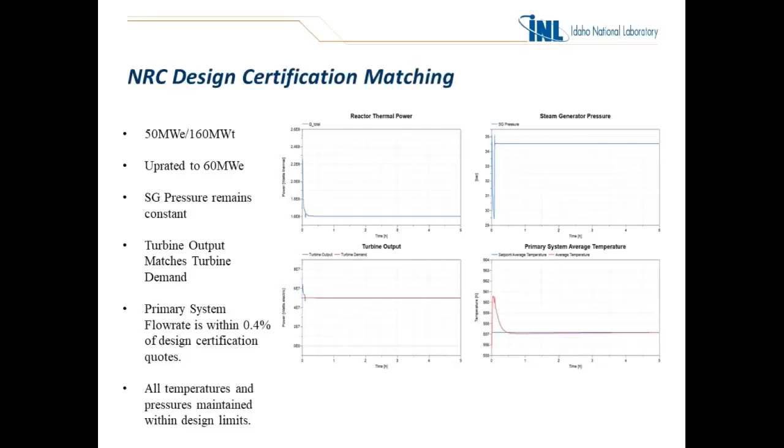And you go into the literature and you can find where NuScale has designed this reactor to go from 100% to 20% back to 100 within 24 hours. Similar maybe to what the French are doing, even more extreme than that. The reactor can manage a 40% ramp rate. Obviously can't do that continuously up and down. That would be bad for the plant, but to respond to transients, the reactor is capable of moving at that high rate. You could do a 20% step in minutes. And this is all at the reactor power levels. So one reactor can do these actions.

Now, the picture we had, 12 units online on the plant. If you were looking forward into the future and you knew that you were going to be operating like Columbia Generating Station at 70% power, and you knew that that was going to go for 3 months, you might well take 4 units offline and then run the plant as an 8-unit plant at full power. And the 4 units would idle away in a shutdown mode and save their fuel costs. And then you would start them up when the demand came back. So some flexibility just by being a modular plant in this case.

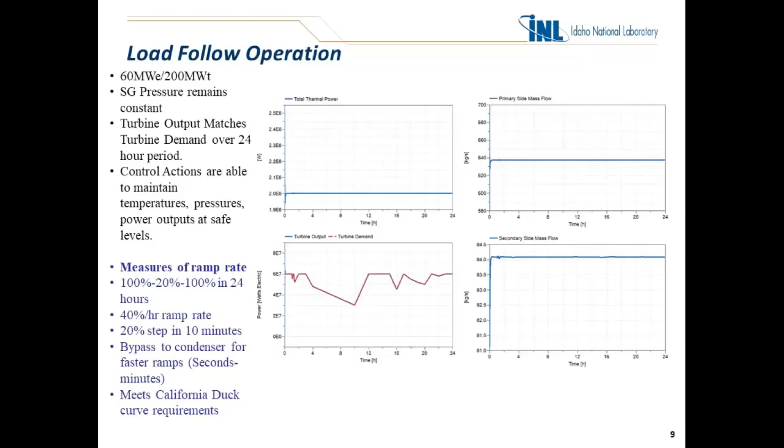So conclusions, NuScale is an advanced design. It addresses issues with deploying the reactors. Since they're individually smaller, they're easier to build, more economic to build. They're simpler to operate. They're simpler to provide the engineering for. These reactors can operate in different modes with different reactors online, different power levels, and different amounts of bypass, making them very flexible on the grid. NuScale sees them addressing different markets, all the way from replacing small coal plants with dual units up to the full-size 12 module units.

And we're seeing that the detailed model can be made, that the response is correct, and that the units actually do perform as expected. And we look to integrate these with other more sophisticated models to actually show how the reactor would perform with a hydrogen system, with wind energy, with other energy storage options. So we're working toward demonstrating sort of the future we've been talking about.

And wrap it up there for questions, I think. Okay, George, very good. I've got several questions for you here. First of all, people want to know when. When will this be deployed? You're building a demonstration. When?

Yeah, NuScale built a very sophisticated thermal hydraulic model in Oregon at the university, and they have used that to get through their licensing in a very linear and expected way. And they expect to have their license here in the next couple of years. The first unit will be on the Idaho National Laboratory site, be a commercial operation. It'll start up sometime in the late 20s.